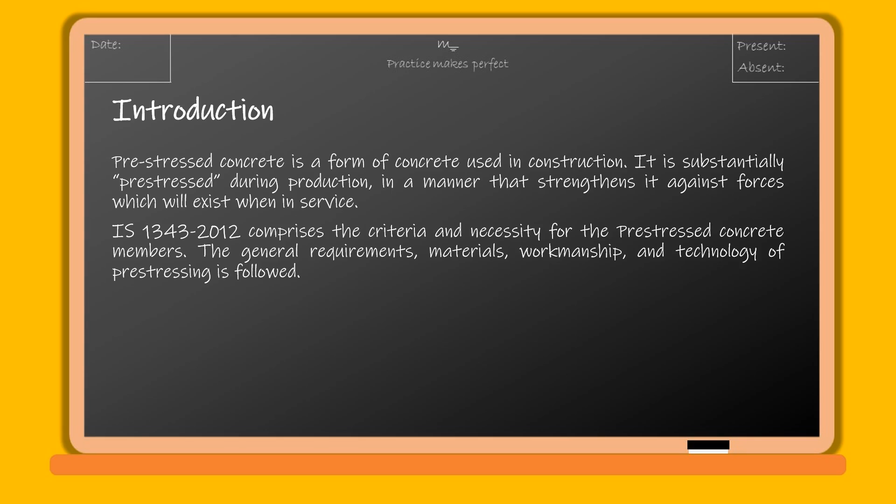Pre-stressed concrete is a form of concrete used in construction. It is substantially pre-stressed during production, in a manner that strengthens it against forces which will exist when in service. IS 1343:2012 comprises the criteria and necessity for pre-stressed concrete members.

The general requirements, materials, workmanship, and technology of pre-stressing are followed. The comparison of non-pre-stressed concrete and pre-stressed concrete is as follows.

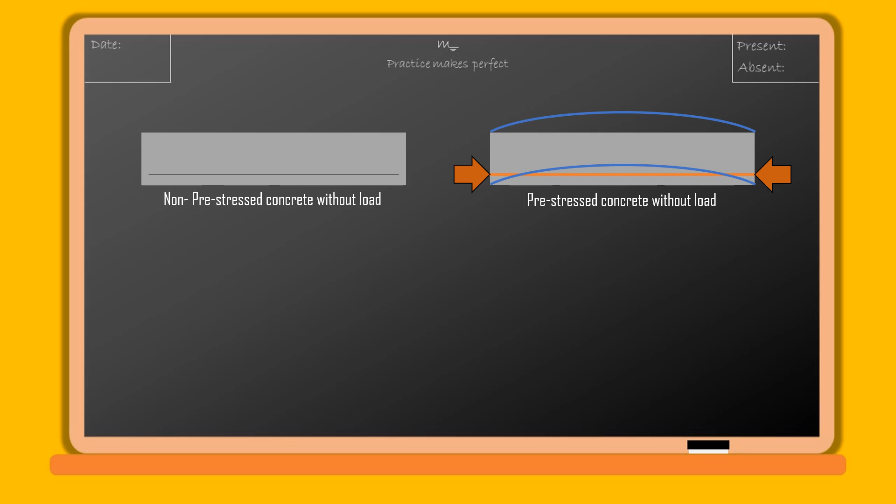The design strength of concrete will be higher than usual, because the compression force from the tendons will lead to develop cracks on the sides of the pre-stressed concrete elements. To resist the compression force from the tendons, the grade of concrete is designed with high strength.

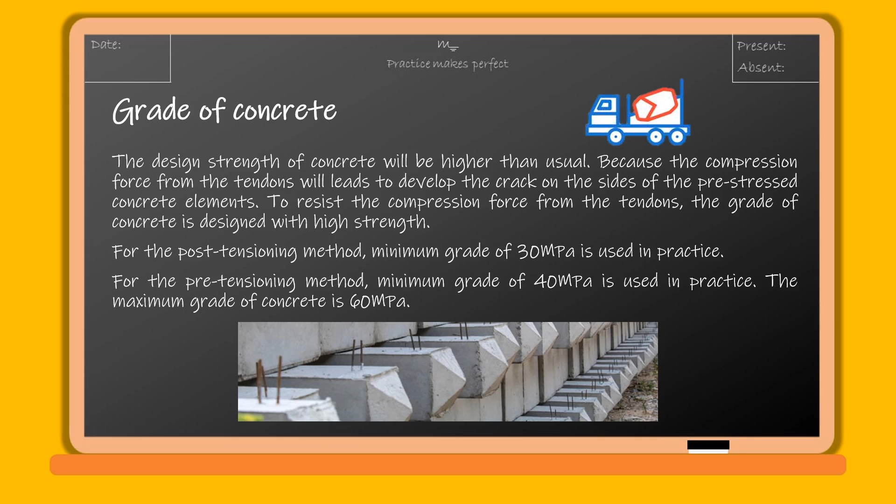For the post-tensioning method, a minimum grade of 30 MPa is used in practice. For the pretensioning method, a minimum grade of 40 MPa is used in practice. The maximum grade of concrete is 60 MPa.

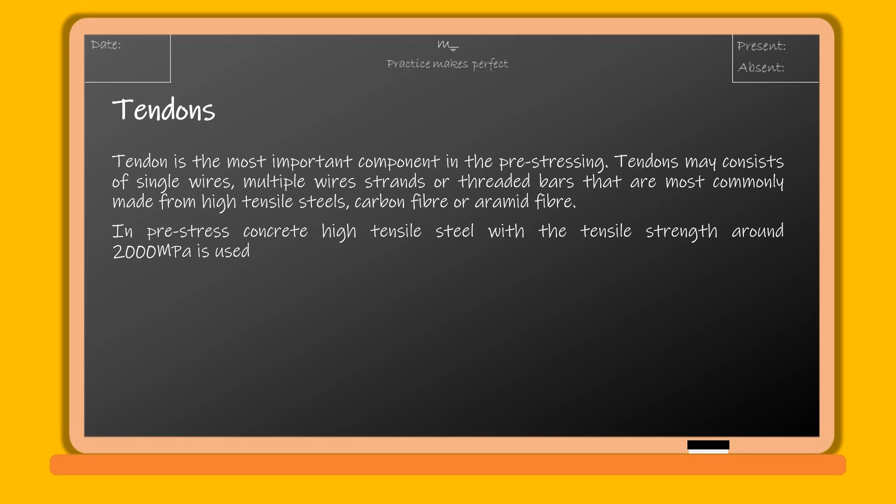Tendon is the most important component in pre-stressing. Tendons may consist of single wires, multiple wires, strands, or threaded bars, most commonly made from high tensile steels, carbon fiber or aramid fiber. In pre-stressed concrete, high tensile steel with tensile strength around 2000 MPa is used.

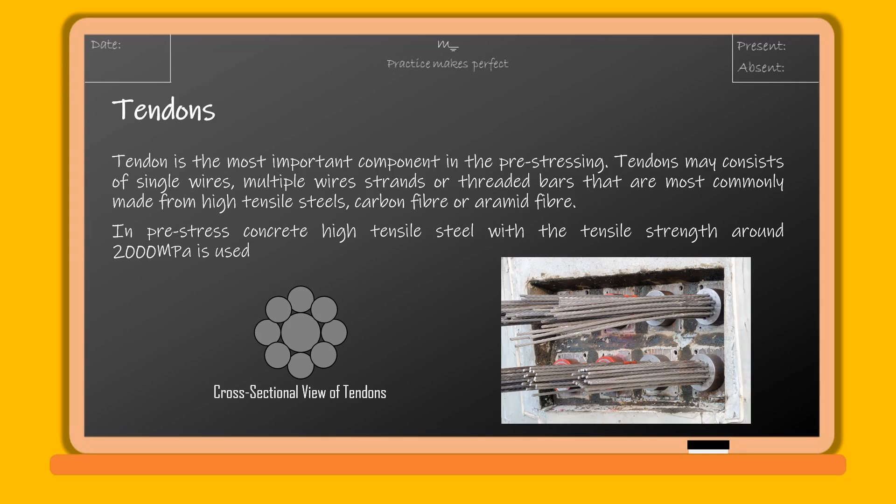Two general methods are used for pre-stressing concrete. Pre-tensioning is the method in which the pre-stressing force is induced before the concrete is placed in position. The anchorage arrangements will hold the pre-stressing force. Post-tensioning is mostly used on site.

Post-tensioning is the method in which the pre-stressing force is induced in the concrete after it attains its complete strength. Pre-tensioning is mostly used in industries, for bulk production.

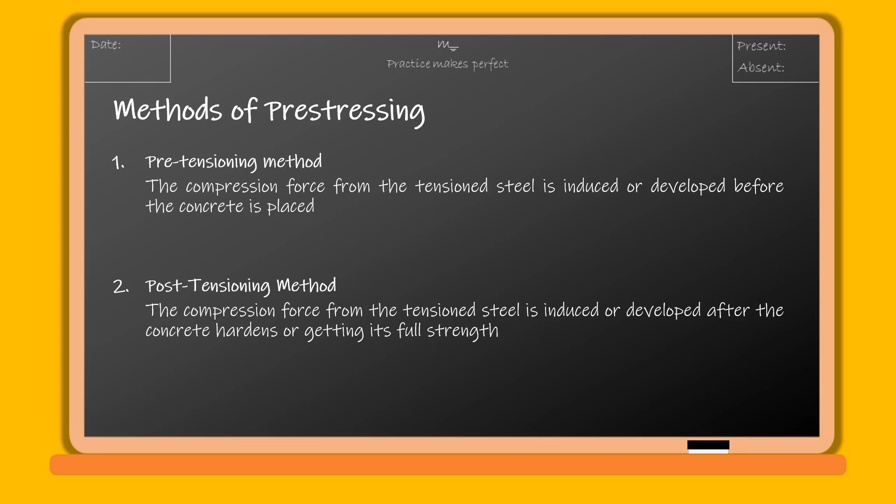Steel has good elastic property, which means if tension stress is developed in the tendons within the elastic limit, the tendon will elongate, and after the removal of tension stress, the tendons will return to their natural length.

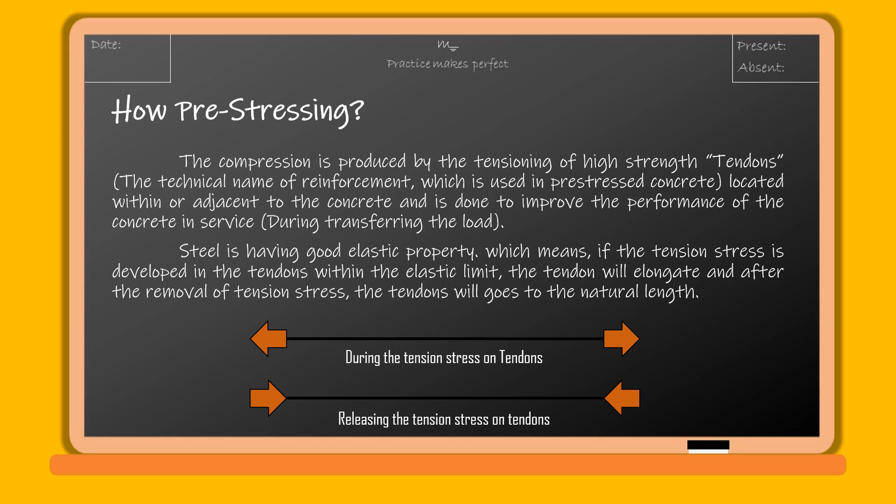After the removal of tension stress, the tendon will try to get into the original length, and this will create compression force on the concrete. To maintain the compression stress in concrete, the tendons are arrested when they try to get into the initial position. This artificial compression force will be developed in the tension zones of concrete, to create compression stress throughout the length of concrete in a tension zone.

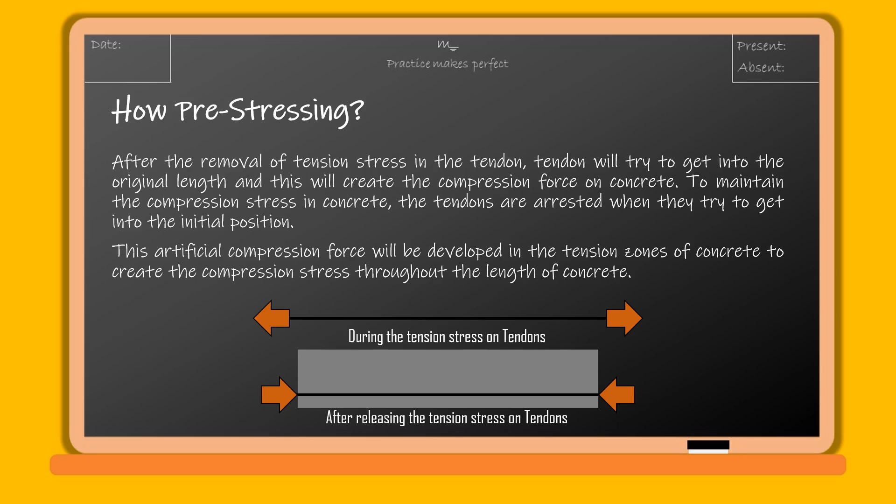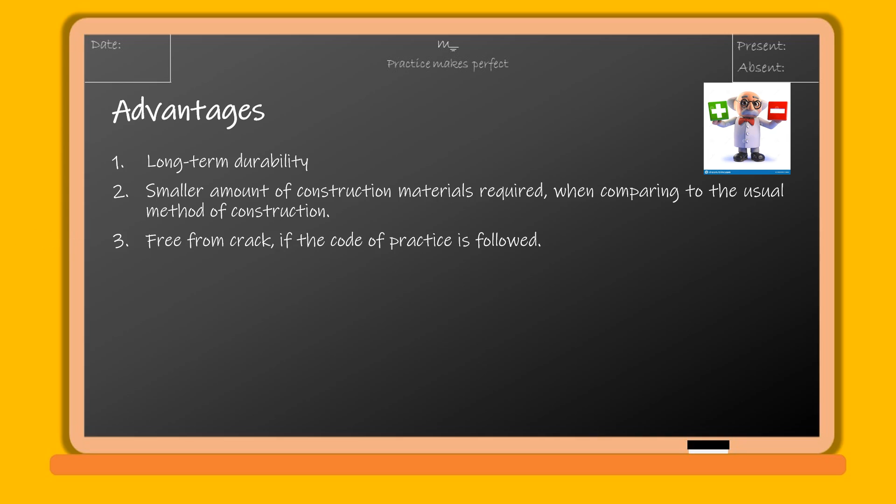Advantages include long-term durability, and smaller amounts of construction materials required compared to usual methods of construction. It is free from cracks if the code of practice is followed to build the pre-stressed concrete elements. Cost of maintenance is reduced because of fewer joints in the elements.

Thickness of slab and depth of beam will be reduced, so the self-weight of the structure will be reduced. Self-weight is an obstacle in high-rise buildings. Longer span length increases untroubled floor space and parking facilities.

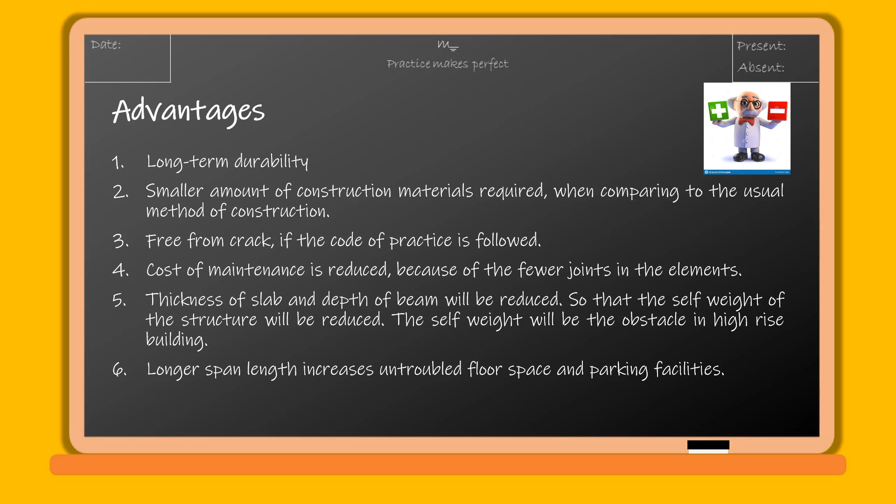Disadvantages: requires high strength concrete and high tensile strength steel wires. Special equipment is needed, and requires highly skilled workers. Construction cost is higher than RCC.

Transportation from the industries to the site will be hard. The pre-stressing method is suggested for use in the following cases, being more durable and economical than usual methods: long span structures such as girders.

Reduced thickness or depth of structural elements. Bridges, electric poles, dams. In foundations, pre-stressed concrete piles.

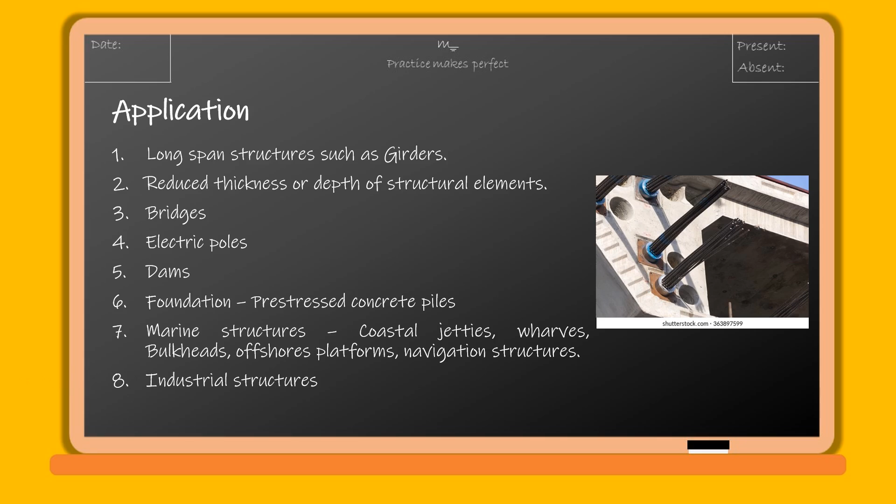In marine structures: coastal jetties, wharves, bulkheads, offshore platforms, navigation structures. Industrial structures. In high-rise buildings: slabs, beams, columns, etc.

The method of pre-stressing concrete is developed to reduce the intensity of tensile force, because concrete is weaker in tension but good in compression.

Even though the cost of pre-stressing the concrete element is higher, pre-stressed concrete is economical in long-span construction and for concrete elements in high-rise buildings.